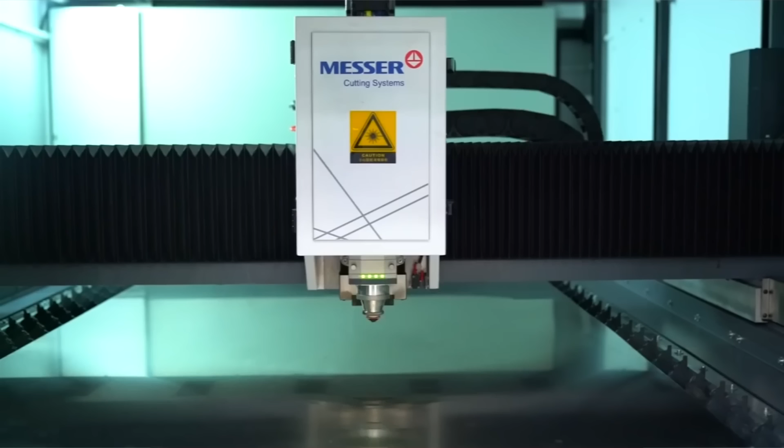Laser cutting is a widely used manufacturing process across aerospace, automotive, electronics, semiconductor, and medical equipment industries. It offers a huge range of benefits and applications. The rise in automation in manufacturing, driven by demand for high quality products worldwide, is driving the market for laser cutting machines. Today we discuss why state-of-the-art laser cutting and metal handling solutions are important in today's manufacturing.

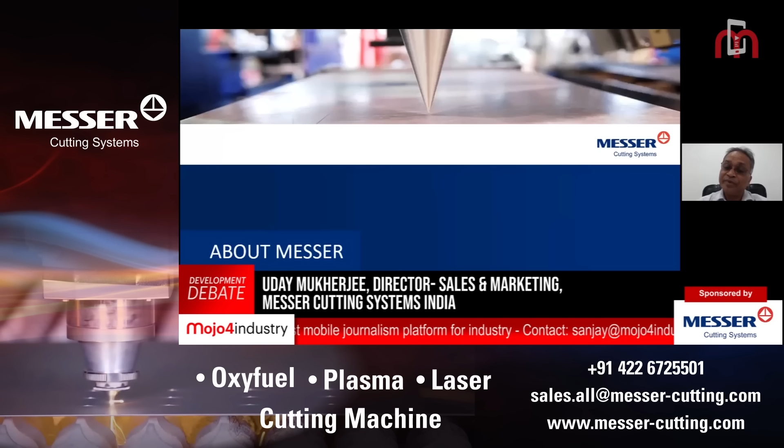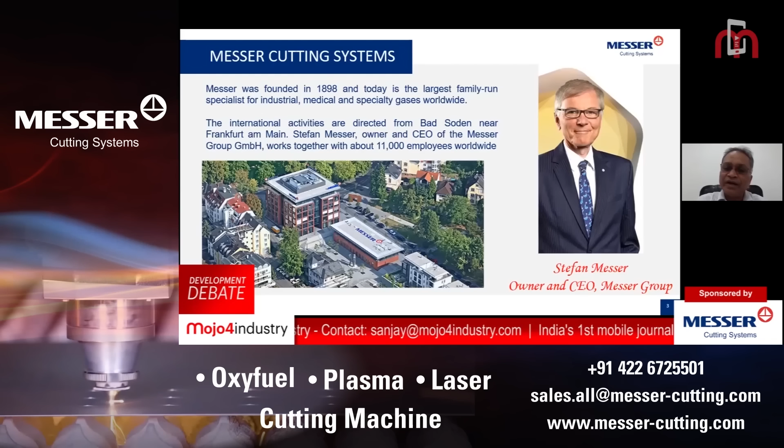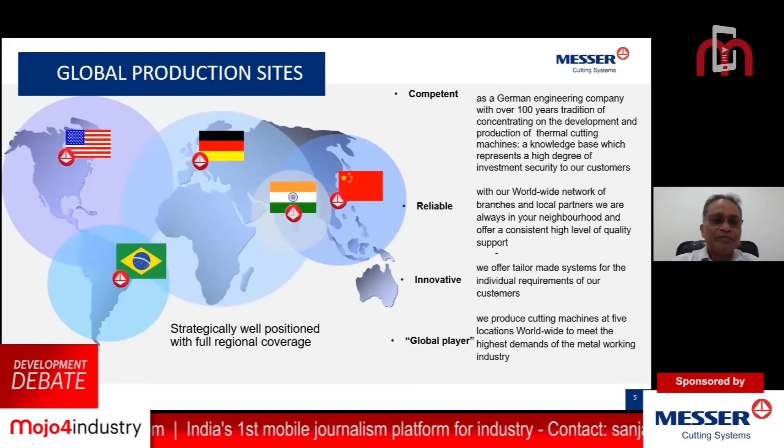Messer Cutting Systems is basically a German company, family-owned and technology-focused, originating in Frankfurt, Germany. This is almost a 123 year old company. Primarily we manufacture these products in 5 regions — the mother area is Germany, and we also have operations in USA, China, India, and Brazil.

Messer was actually the originator of CO2 laser cutting globally. We started our laser cutting activities in the 1970s, which a lot of our clients and customers do not know — but we were there right from 1970. In between, we focused more on plasma and gas cutting machines, and while doing so, we developed a lot of expertise as far as R&D is concerned for going into fiber laser.

In 1997, we restarted our laser activities in the form of LaserMat, which are gantry-based machines. Then in 1998, we went into pallet changer type machines with CO2. In 2007, we started our new generation fiber blade machines, manufactured in China as well as Germany. Then in 2017, we relaunched these machines in India, starting manufacturing in Coimbatore. Whatever machines you see in India are 100% manufactured in Coimbatore, and these machines are exported from India to the Middle East, Canada, and now USA as well.

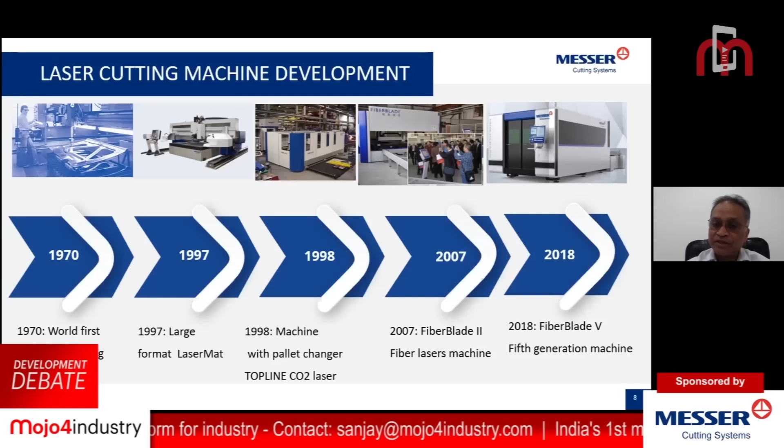So I would like to mention here that Messer cutting laser machines are basically European machines made in India. So you get the best of the machines, European quality machines, at Indian rupees.

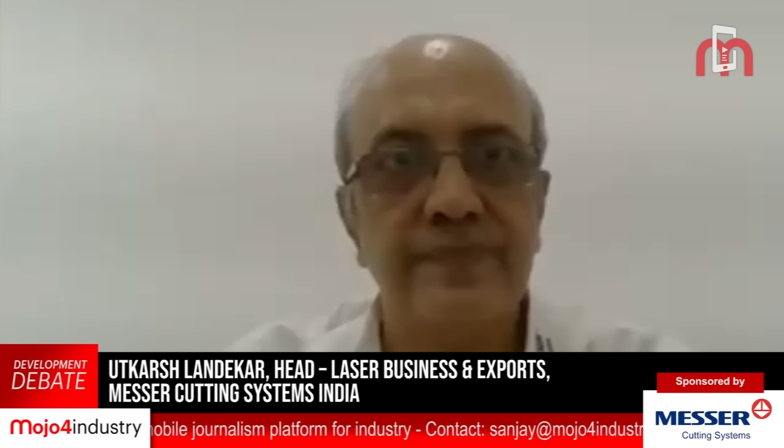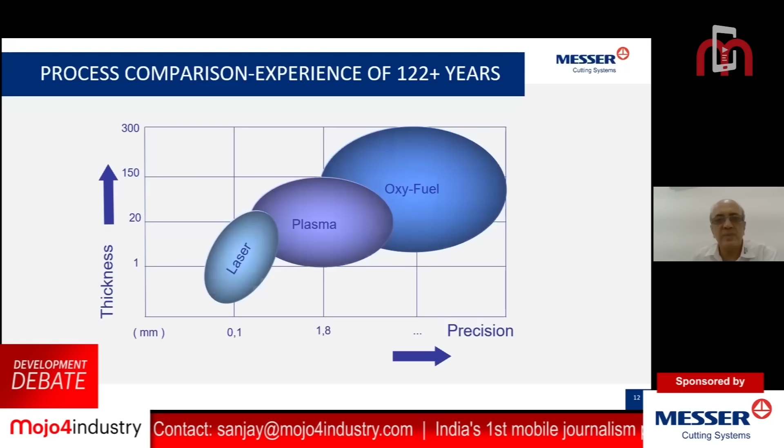Thank you, sir. Now, the experience we have gained over more than a century allows us to create one bubble diagram, which is useful for all engineers to decide which process is suitable for what tolerances and how thickness can influence the process to be used. When we look at very short tolerances — say 0.1, 0.2, up to plus minus 0.5 — you are into the laser zone, where from 0.5 millimeter until 25 millimeter is a viable process as of 2021. Of course, this bubble is likely to expand and become much bigger as laser powers go up, and we will be discussing that.

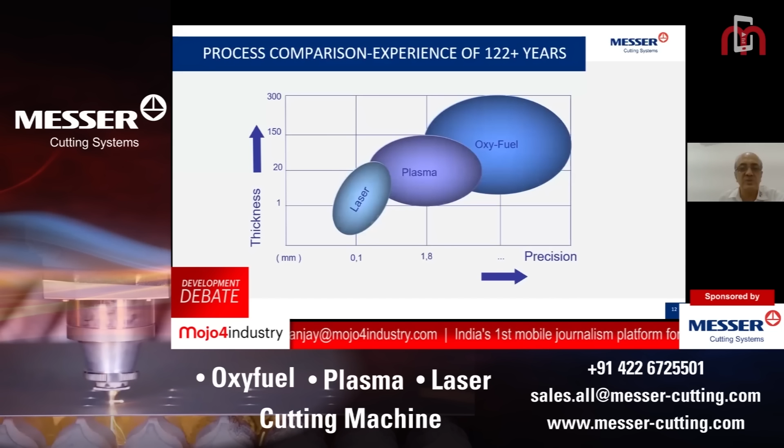Plasma has been dominating the 1 mm to 150 millimeter range, with tolerances of 0.5 millimeter to plus minus 1.5-2 millimeter, depending on thickness. And of course, oxyfuel is the age-old, century-old process invented by Messer, covering the 6 mm to 300 mm area of operation.

Now, when we look at the same job cut in overlapping areas, let's say 10mm or 12mm, it can be processed with oxyfuel, plasma, and laser. When we look at all three processes doing the same job, productivity will be one of the criteria. In certain thicknesses, say 12mm, the job can be done in 43 seconds with plasma, laser will take 57 seconds typically with a 4 kilowatt laser, and oxyfuel will take 2 minutes 46 seconds.

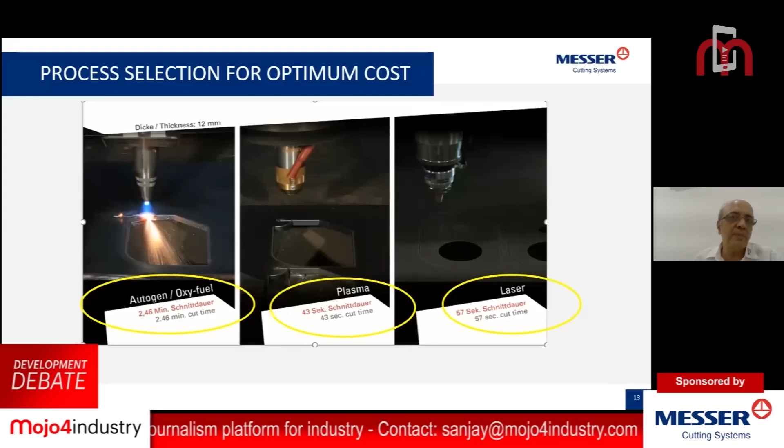But as the thickness keeps going up, laser and plasma start losing out, and only oxyfuel remains in the race for mild steel cutting.

Now, as we look into the industry where they need to select a process, there are certain criteria where the entire industry across the country treats us as a consultant. When we are in consulting mode, we have more than 1,200 customers who always discuss with us what is the right capital cost, whether it is high or low, cost of maintenance, power cost, gases cost, which gases to use, how they are to be handled, and what are the kerf losses.

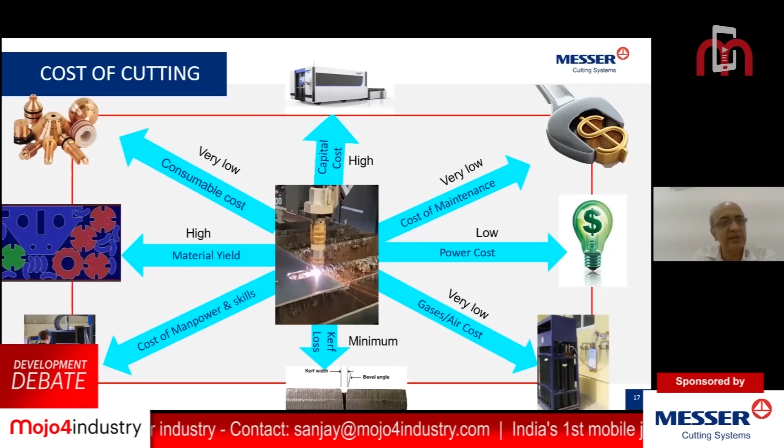We also do yield analysis and time study for our clients, then look at how to train your manpower and upgrade their skills to get maximum out of a machine, which methods to maximize the yield, whether you need to change the process or use good software or good mechanisms to get maximum material yield, and what day-to-day consumables are required.

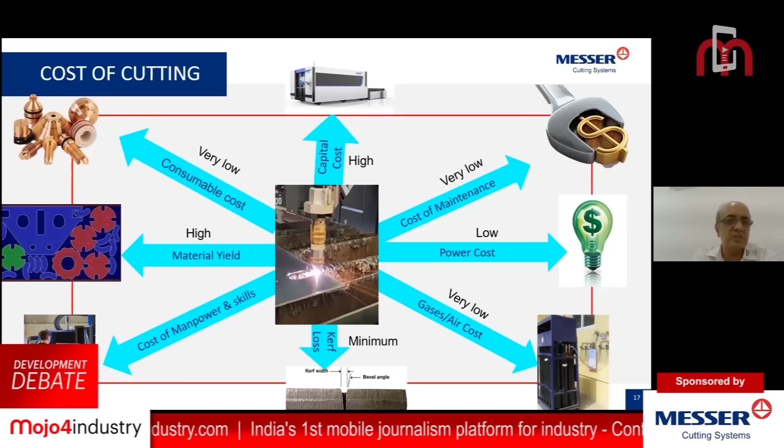So when we look at the cost of cutting, which is the buzzword today, we always have our customers coming to us and taking our word as a guideline for their decision making.

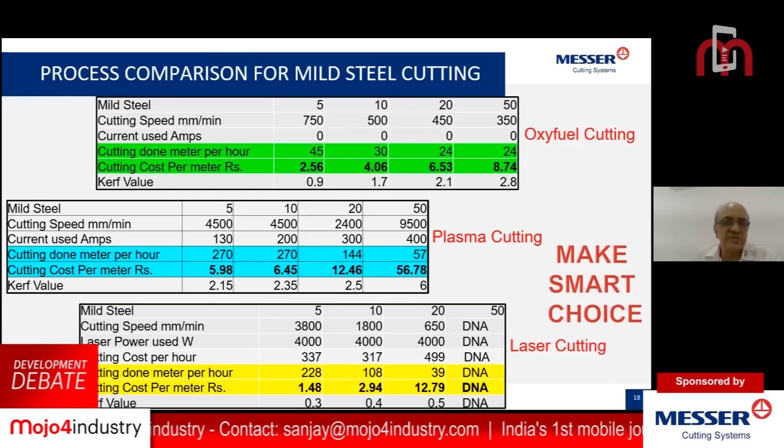Typically when we go into process selection mode, we have 5 mm, 10, 20 and 50 mm of mild steel forming a majority of the plate cutting happening in the industry. How do we select a process? One will be based on the cost, secondly on the capability, and third is what production you are going to get per hour.

One case study is an exhaust fan or FD fan manufacturer who manufactures impellers and casings. He has to use a 1500 by 6300 plate which is available in the market, and then he has to make a choice which process to use.

So we have shown you the diagram, laser versus plasma process. Apparently it seems that plasma is burning out more material, but sometimes burning out more material can also give you good surface finish, and it gives a yield which is not very bad. You can still manage with the yield.

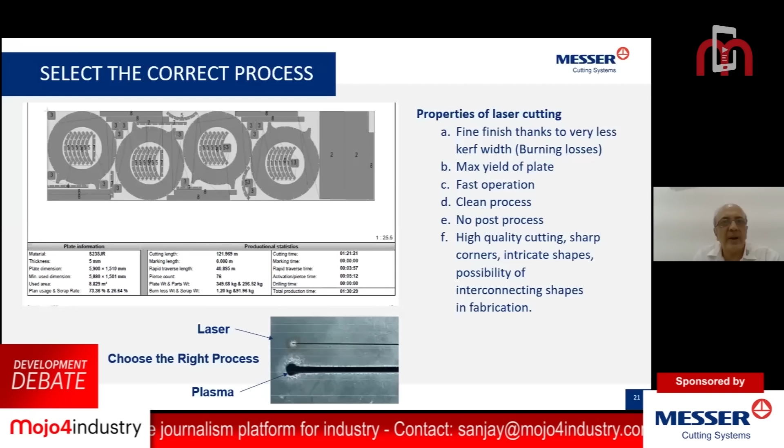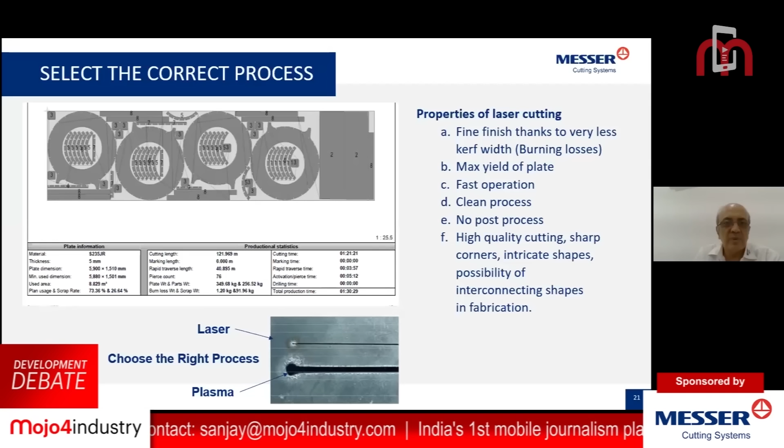And laser will definitely give you more parts from the same plate, and it will give less heat input, with no post-cut operations. But the range is limited, as shown in the bubble diagram, 0.5 to 25, which is reliable.

Next criteria when you select a process between oxyfuel, plasma and laser: the hole diameter comes as a stumbling block, which prevents you from choosing one process or another. So if you take oxyfuel, the reliable holes have a diameter of twice that of the thickness.

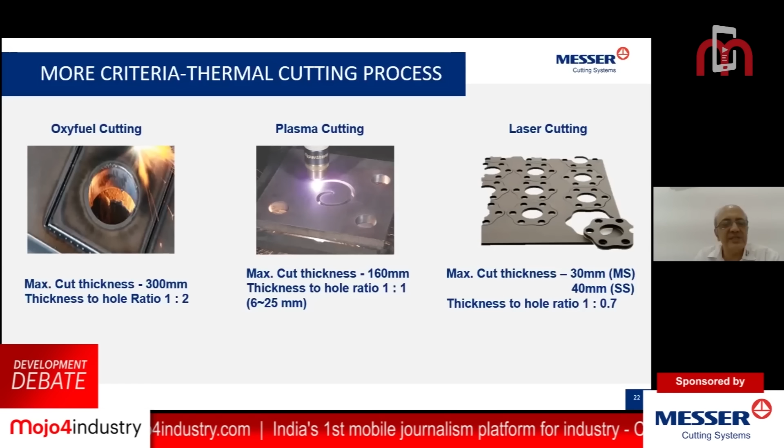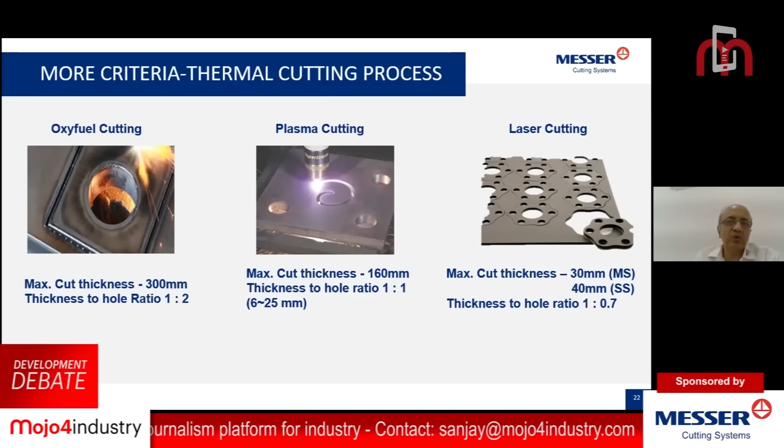In plasma, between 6 mm to 25 mm, you can still get a 1:1 ratio; otherwise the ratio remains like oxyfuel, twice the diameter of the thickness - that is, a 10 mm plate can have 20 mm holes. In laser, between 0.5 mm to 25 mm, you can still have the ratio of the holes at 0.7 times the thickness.

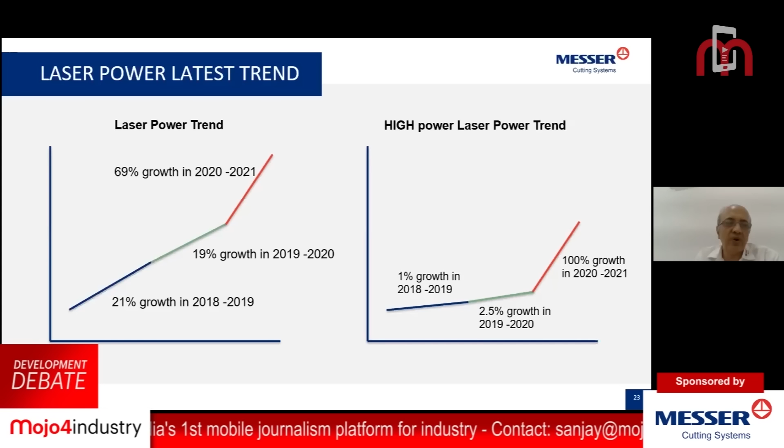Now, with this background, lasers have started growing by leaps and bounds. If you look at any growth rate, it is surpassing any industry - the growth rate is at 69% of the overall laser cutting market, and out of that, the high power laser. When we say high power laser, we call the laser which is more than 3 kilowatts as high power laser.

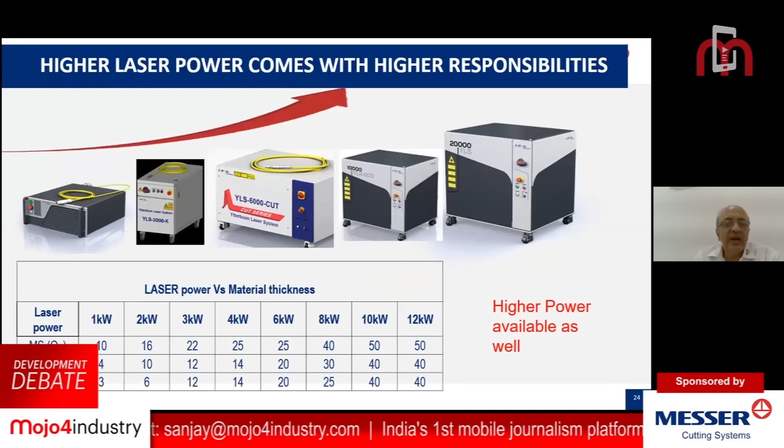However, when we say higher laser power comes with higher responsibility - that is, you need to handle the laser properly, in a safe way, and you know how to handle the laser. So that's how we say higher power laser comes with higher responsibility.

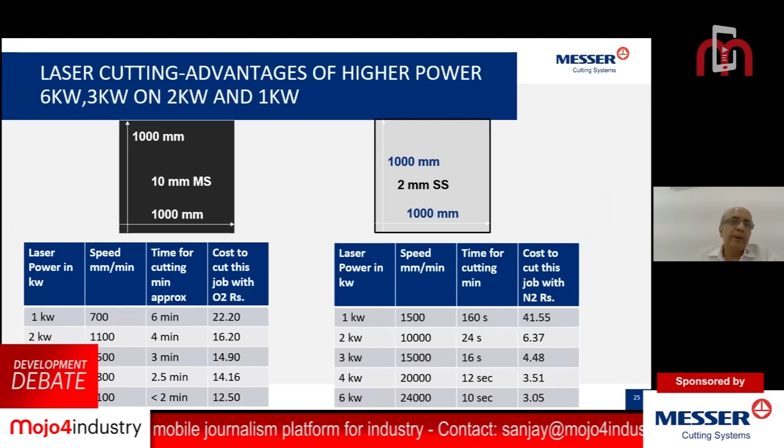Let's say you have to cut 1 meter by 1 meter of 10 mm mild steel, and 1 meter by 1 meter cutting with nitrogen on 2 millimeter stainless steel. So you also have to look at the power taken to cut the material, what the economics are, and in how much time you are going to cut.

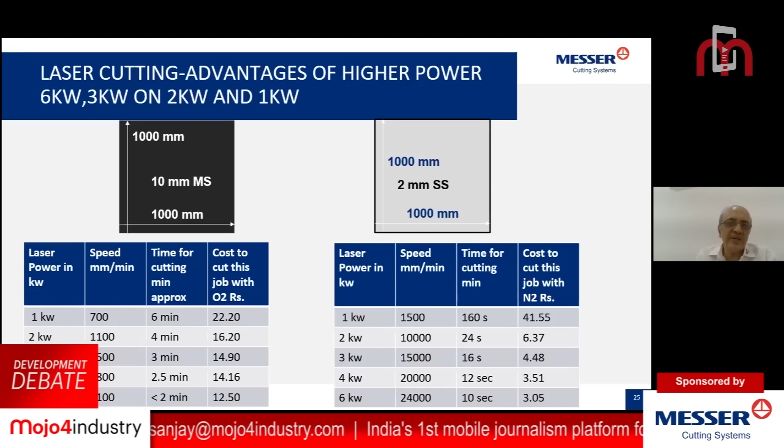So higher power gives you some benefit. There are some disadvantages, but definitely the economics always surpass many of the disadvantages.

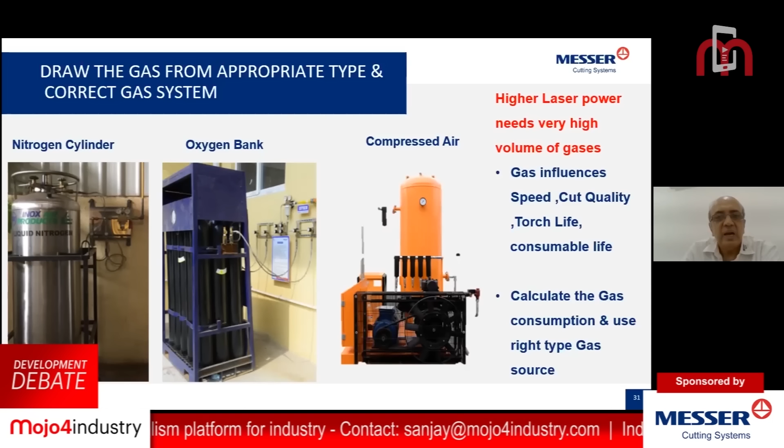So you need to use the correct type of gas. It definitely influences the cost of consumables, the cost of cutting, then the quality of cutting, and you need to draw the correct amount of gas through the correct cylinders.

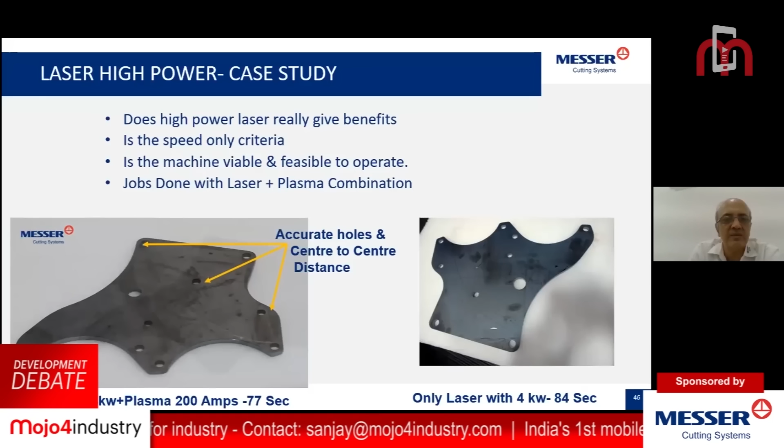This is the latest trend we have been processing, and we have already supplied equipment with such combinations. Customers are very happy to use this techno-commercially viable process.

So Mr. Ravi, you can start with the IoT and automation and material handling solutions.

Thank you, Landekar. There was a nice presentation by Landekar on the laser cutting process and what is being offered for the laser cutting industry. What I'm going to talk about is, leaving aside the laser machine, there are a lot of other peripheral activities happening around the machine to keep the industry running.

The main thing is automation and IoT of machines. We have software that can give full monitoring to the management across the globe. You need not be in the factory at all. These are all based on the internet, and it can be monitored from anywhere, so we need not have a separate team of people going around doing the production process study.

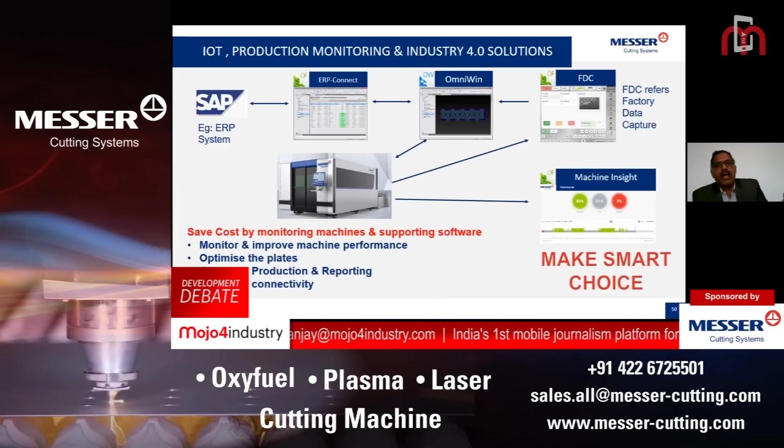So what it means is fully automated cutting can be done with our system. We have two segments in this package, called the OmniWin package. One is based on ERP demand and cutting the material, with the data going back to the ERP, so the customer has the full cycle of production data happening on the shop floor.

The other system is inside the machine, which gives you the performance of the machine - how well the machine is utilized, how well the operator uses the machine, how much time it takes for setting up the machine, and if there is any breakdown, how much time the machine is down for a particular period. That is automatically given in terms of data and pictorial representation directly to the management.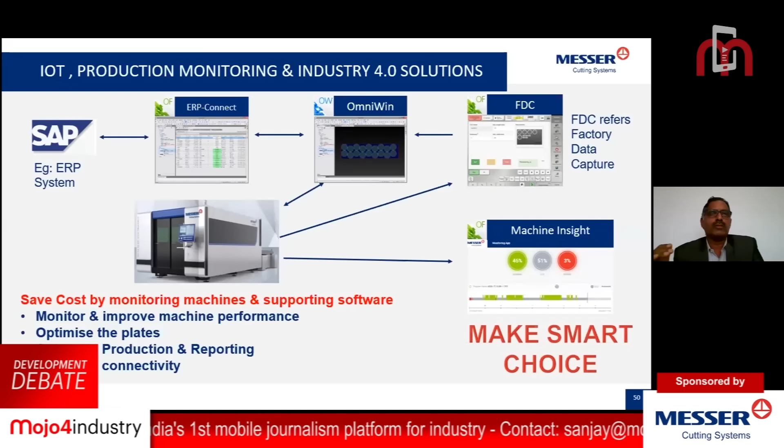Multiple users can have access and monitor the performance of the machine. Right now the industry is more into these activities which will aid the cutting process and production process, so that your production process goes on uninterrupted, and planning can be done in a better way.

This is about machine performance and production. There's another thing called the material handling system, which is actually a huge contributing factor to machine waiting time - waiting for material to be loaded. The machine can actually remove the idle time for loading, unloading, and setting up through these material handling systems.

The benefits of the system are that unwanted, unskilled labor is reduced to a greater extent. When you use a storage system, more than 60% of your floor storage space gets reduced, and you have a systematic way of managing your inventory. So your inventory cost is also coming down, and unwanted labor cost is also coming down.

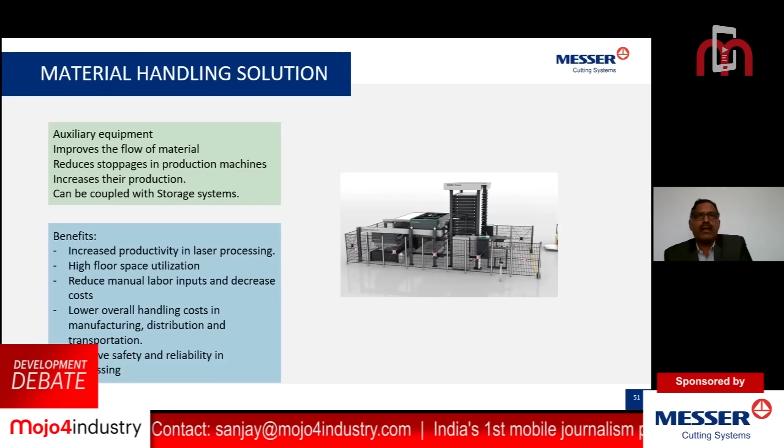More than the machines, the peripherals like material handling and IoT and machine monitoring systems are more important in an industry - people loading it onto the machine and unloading the cut parts onto another trolley or storage system. That is one part of the material handling system. The other part is the raw material storage itself.

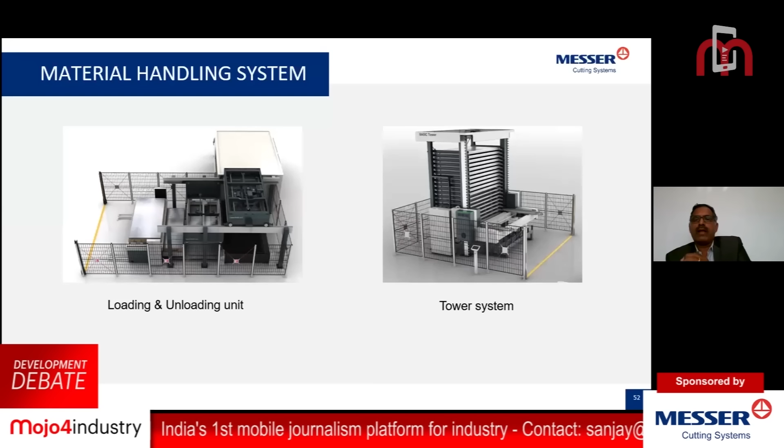We can store separately. We can have a vertical storage system where the storage is well organized, and that can be integrated with the ERP system, so the planning person knows exactly how much material is available at which location. To that extent, the inventory can be maintained. So what you can see now on the screen is a machine.

Machine is not visible because it's on the other side. It's coupled with a storage system and the loading and unloading equipment. So the advantage of this is one person can manage the whole process.

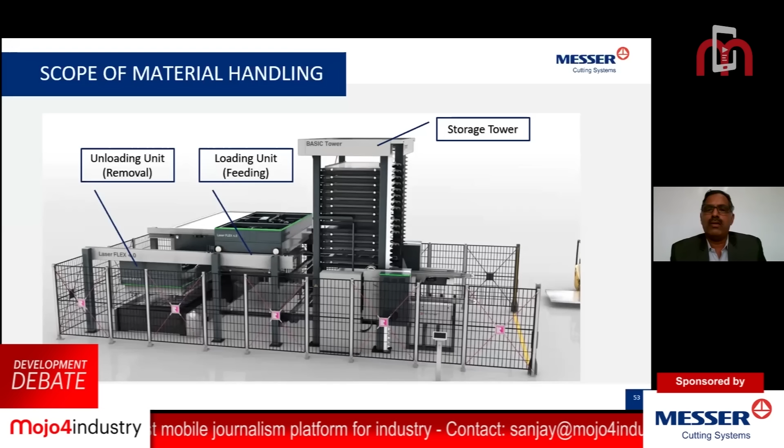First, the material is loaded onto the storage system and logged onto the inventory system, wherein the material quantity and material type is specified and in which pallet it is there, and from the machine the material is pulled out.

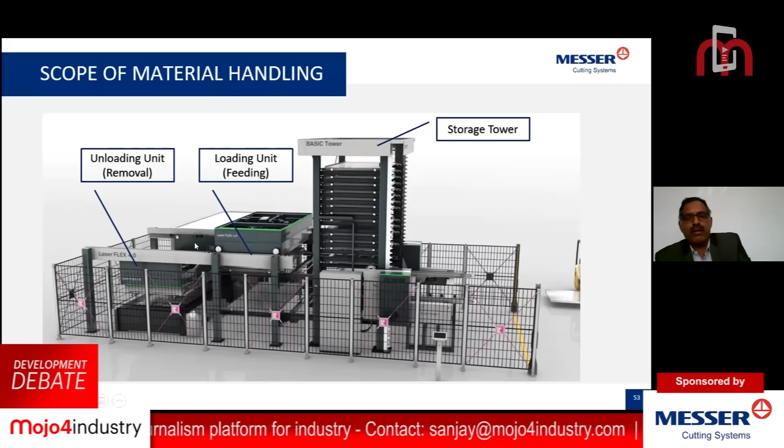The command comes from the machine to take one particular material, and the material is taken out, the pallet goes out, and the loading system picks each plate from that pallet and loads it onto the machine. And the moment the material is cut, the unloader picks the material like a fork and puts it onto the other side of the machine.

These are the major parts: one is the loader, one is the unloader, and one is the tower storage system.

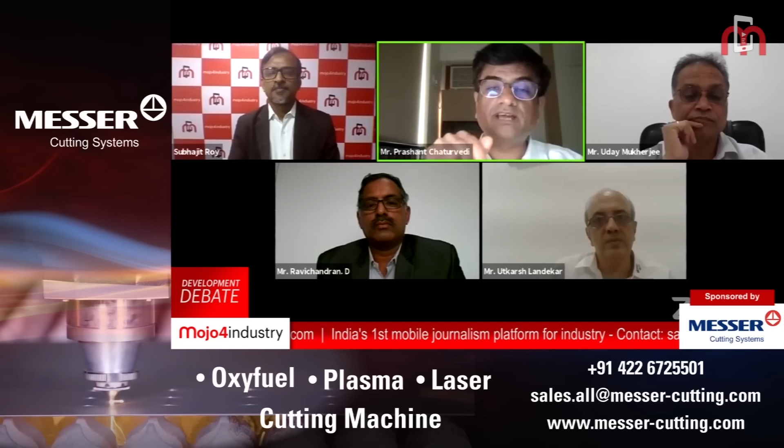Just imagine that when we are talking of oxyfuel process, plasma process, and laser process, there are two speeds that we generally talk of. One, we talk of the cutting speed. Now, this cutting speed is a process limitation. It's defined, you just cannot keep increasing it.

Then we talk of the positioning speeds. That means before the cut process or between the parts, how fast your machine works. So these two processes, everybody is increasing.

But at the same time, if we have the fastest machine, but we are not handling the material rightly, and there is a lot of idle time between loading and unloading of your components, either the raw material or your finished components, then a very fast machine will make no sense.

So generally people say they have the fastest machine, very high cutting speed, and it's all fine. During the cutting process you saved a lot of time. But if you wasted a lot of time handling the inward material and the finished part, actually you just invested more.

So if we are really looking for a productivity solution, apart from the fast and quick, accurate machines, we also need the solutions that Mr. Ravichandran has elaborately defined, where the loading unloading part of the machine process is totally taken care of, and that time is reduced.

Mr. Prashant, just as an extension of what Mr. Utkarsh was talking about, there was a kind of shortage for industrial use of oxygen, and industry was struggling. And you actually take care of the oxyfuel business for Messer in India. So how did you manage this, and how could you meet your client's requirements at that point of time?